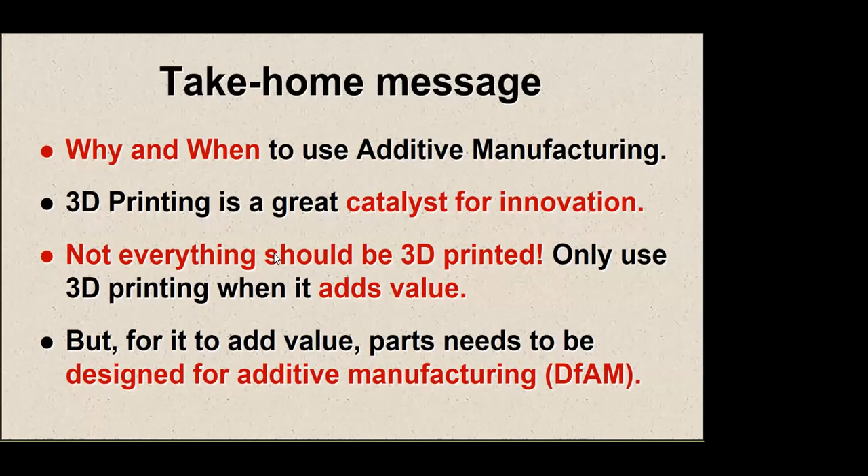additive manufacturing. Today, really, the take-home messages for you guys is why and when to use additive manufacturing. And really important takeaway is that not everything should be 3D printed. It's great for some things if it adds value. If not, it's probably the most expensive manufacturing method in the universe. So knowing when to use it for the right reasons, and for that to work, you really have to design for it. If you come with a conventionally designed part, designed for machining or injection molding and print it, yes, it can be done, but it'll give you a mild heart attack when you get the price for it.

So learning how to design for it the right way is absolutely critical. So I guess, the first question is, the reality today, additive manufacturing, how good is it? Can it be used for manufacturing? In many cases, absolutely yes. In all cases, definitely not. So again, understanding what the reality is important.

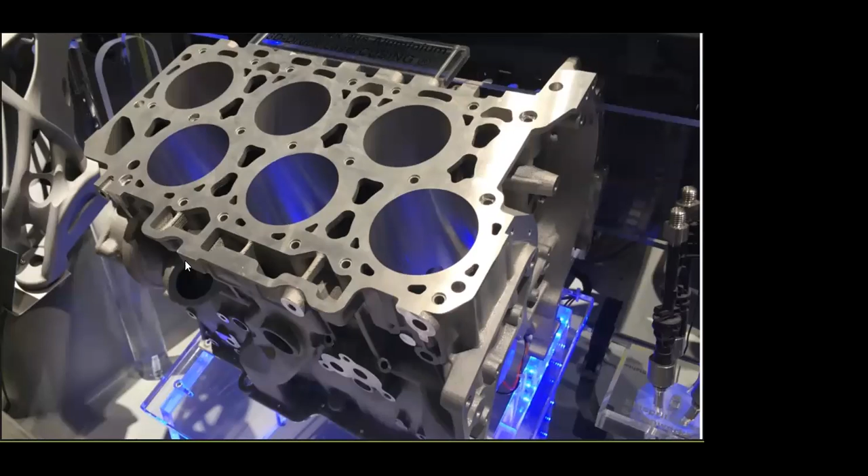Additive, exactly the same. And a really good example of that, this is from Formnext from 2 years ago, an Audi engine block printed. You can see the front row of pistons has been bored out to make it nice and smooth. The back row of pistons is as it comes off the machine. If you tried to run pistons in that, they'd grind themselves to death in a few minutes. So yeah, the reality is it's definitely usable, but you need to understand the parameters through which you can use it. So the next question becomes, why is everybody so excited about additive manufacturing? Why is it a hot topic now, anything to do with additive manufacturing?

I guess the answer is fairly simple: growth. The growth has been 20 to 30% over the last decade. Unbelievable growth, and it doesn't look like it's going to be slowing down. Even with COVID, it may not be slowing down all that much.

But by and large, in my opinion, that growth is driven by the big boys—Siemens, GE, all the big companies putting big money into it. There's still not many SMEs you can walk in today and see using additive manufacturing for real manufacturing. The simple reason is because it's slow and expensive.

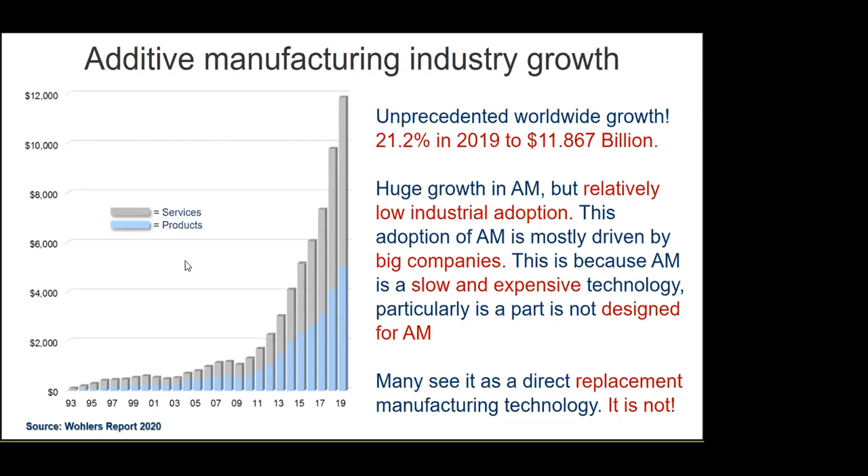So understanding, again, where, why, and when to use it is really important, and it's not a replacement technology for conventional manufacturing. That is really important. In my opinion, even looking 10 years, 20 years down the track, I don't think additive will ever replace conventional manufacturing. It's a complementary technology that, if you use it for the right reasons, gives you enormous advantages, and that's when you want to use it.

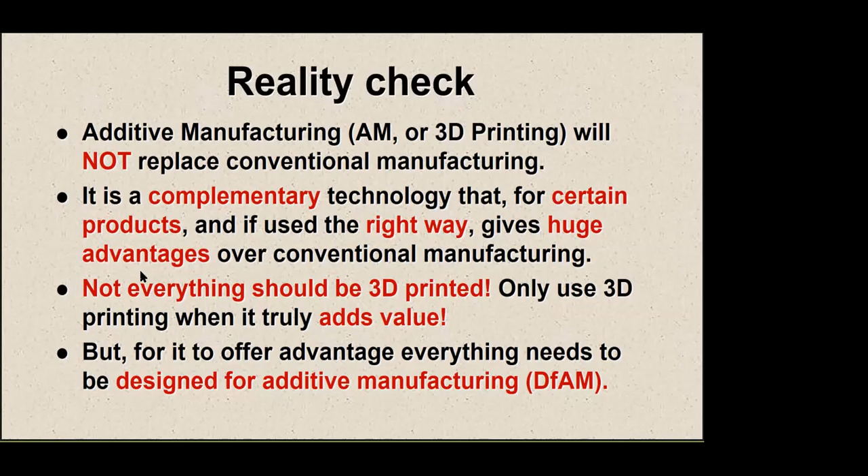Not everything should be printed. So it always becomes an equation of the value of the part versus the cost to make it. Going through some of those advantages, the best known of which, of course, is complexity.

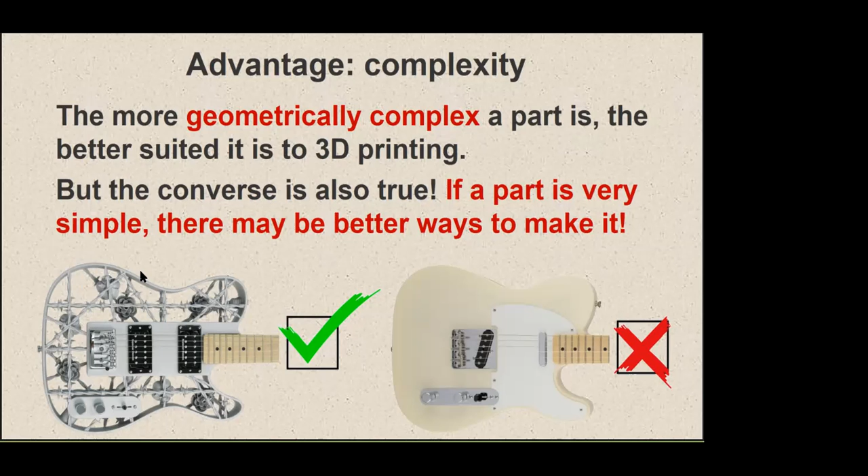So some examples of that complexity that we see a lot about: the best known one, or the very popular one, is topology optimization. Topology optimization is using mathematics to get rid of the material that's not doing anything useful. If you looked at the table or the chair you're sitting on and did an FEA analysis, you'd find 30 to 60 to 90% of the material is not doing anything useful structurally.

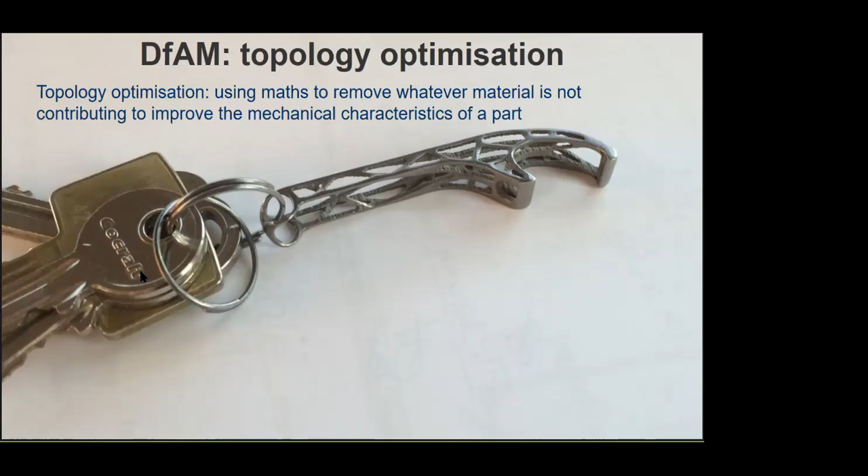So the question becomes, can you get rid of it? If you get rid of it, it makes the product lighter. So what you see on screen there is a titanium bottle opener that's on my keychain.

If you were to look at the conventional way, you'd start with a block of, in this case, aluminium—some billet aluminium weighing around 10 grams. You'd cut away around 60% of that, and your final product, the bottle opener you see in the middle, would weigh around 4 grams.

In contrast, the topology optimized one weighs one gram. Now think about that—that's a 90% weight saving over the original block of material. So the material savings can be enormous.

If weight saving is a big advantage—think about airplanes, aeronautics, race cars—then saving that weight is hugely valuable. The fuel savings in a year on an airplane, the difference between winning and losing a race, can come down to a few hundred grams.

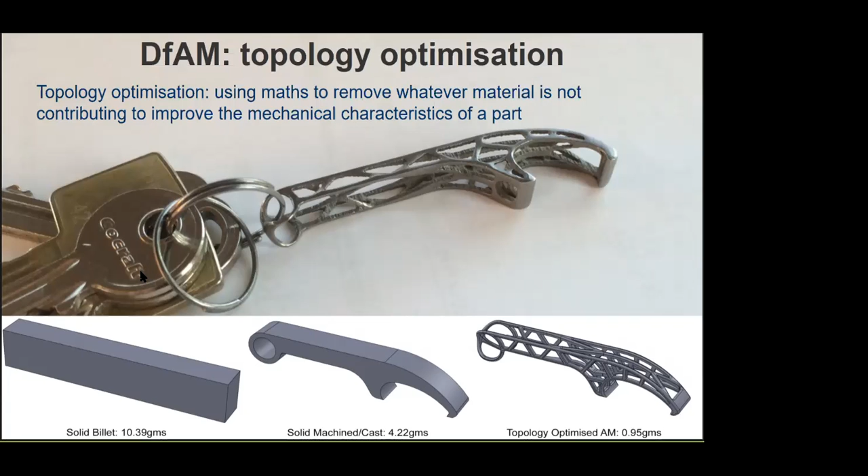Now, mountain biking people are crazy people. They spend stupid amounts of money, which I don't understand, on bikes. So that's a perfect market—it's not about how much it costs, it's about how much performance advantage it gives you. In this case, saving those grams gives you that performance advantage.

Another real world example that I was involved with a few years ago was for Atlas Copco, for a hydraulic manifold for an underground drilling rig. So what you see there is one of these giant tractors that goes into mines underground and drills holes.

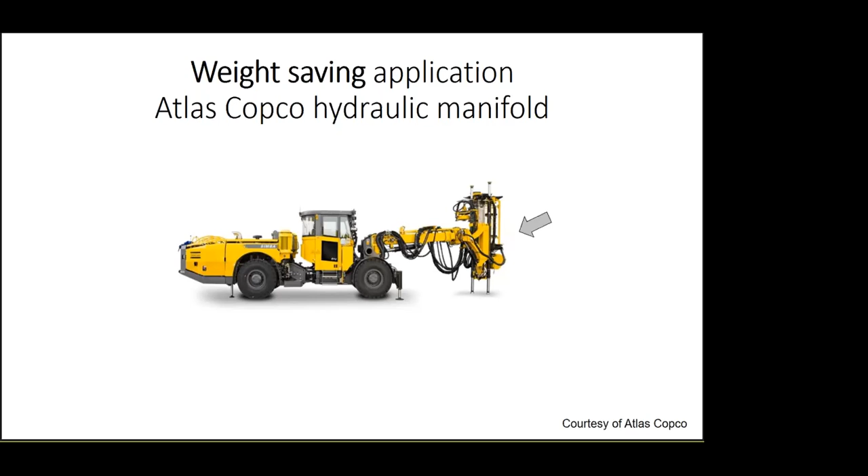I assume that's what it does. On the right side, you can see an extendable boom arm, and on the end of that, there's a hydraulic manifold, which is a block of material that takes hydraulic fluid from one place and distributes it to lots of other places. So this is what we're talking about.

At the end of that boom arm, there's that block of steel. So that's how they make manifolds today. They take a block of material, drill a whole bunch of straight holes, plug some of the holes, and that forms an interconnecting network of pipes that takes the fluid where it needs to go.

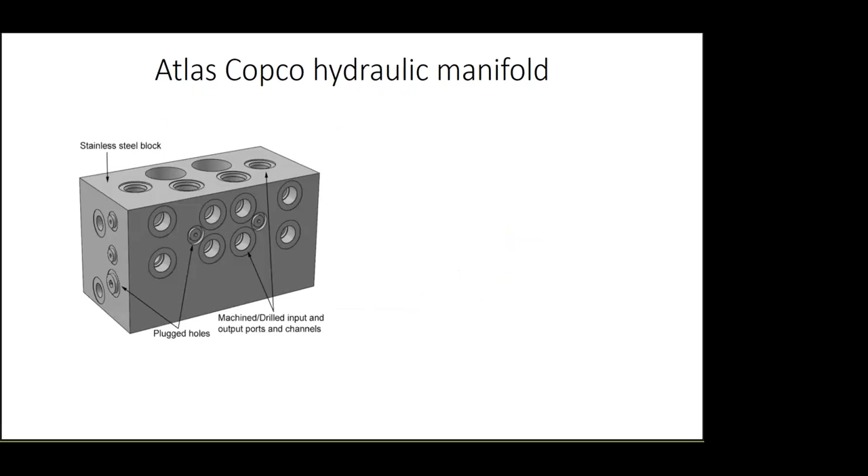They needed to lightweight that because it's a boom arm that extends, they needed concrete counterweights on the back of the underground drilling rig. We redesigned it, going from 16 kilos to 1.4 kilos. So it's a 92% weight saving. That is huge, but it's not just the weight saving, it's the material saving.

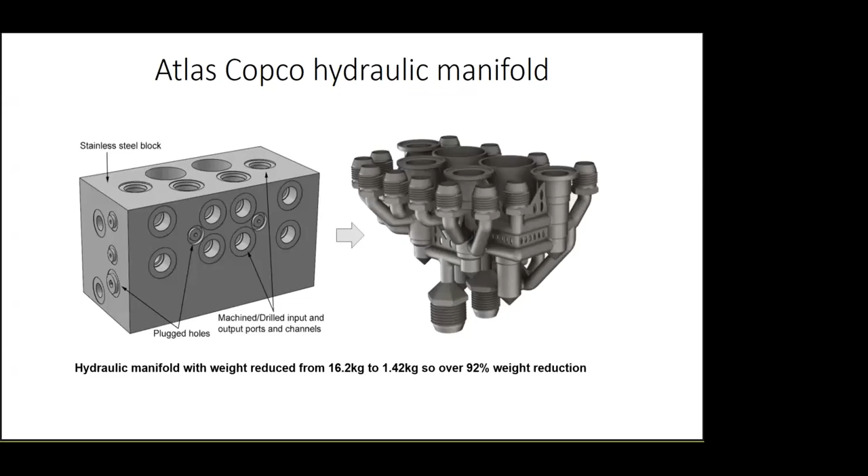This is a good example of design for additive manufacturing, because the first time we printed it, Atlas Copco said we want it printed in the orientation you see it there on screen, so vertically. The reason for that is they wanted better surface finish in the top where the valves go in, seat in to the top. So when we first printed it, we printed it that way, and you can see all that support material.

Support material in metal printing and in extrusion-based plastic printing is sacrificial material that you break away afterwards and throw away. So that was the amount of support material in it.

As it turned out, we had to machine those seats anyways to give it the RA value, the surface finish tolerances that it needed. So we now redesigned the entire manifold to be printable the other way around, and it's now printable with basically no support material.

So you cut it off the build platform when you're done, and the part is good and ready to use. In fact, even the threads are used as you see them there. They have copper bushings that provide the seal, so they don't even need to chase the threads to clean up the threads. And it provides an adequate seal. It's not the smoothest thread in the world, but it does work.

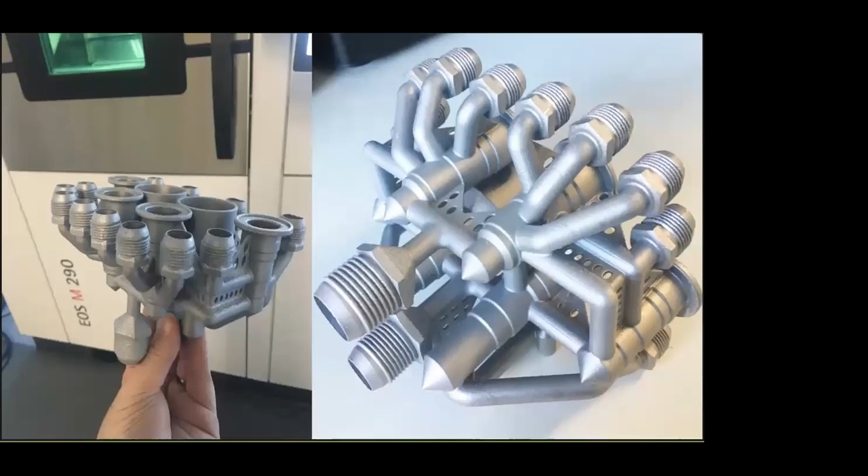So that's the finished manifold there. I'm holding it in my hand, so it gives you an idea of the size of it. The block of steel that makes it up, you cannot lift up with one hand. It's just that heavy. So as a complexity...

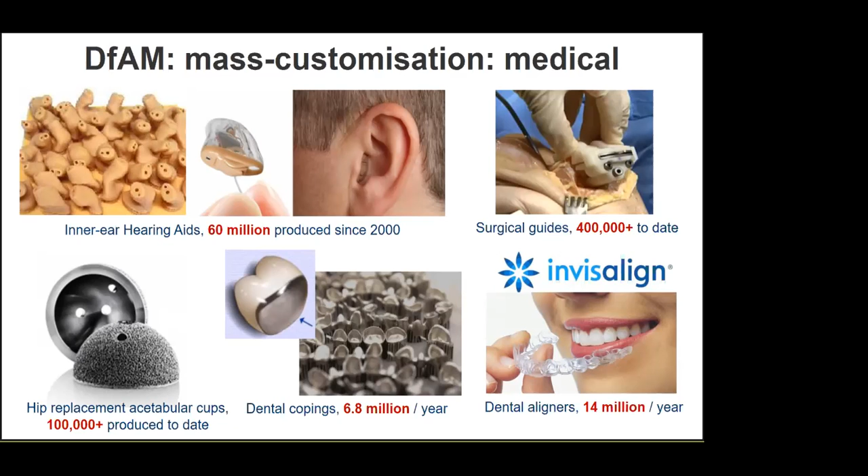But what's interesting is look at some of the numbers on screen there. We're not talking small quantities. We're talking reasonably large quantities. So mass customization in medical is huge. And one of the areas we've been doing quite a bit of work on is prosthetics.

So that whole area of mass customization is great. And one that came up coincidentally about 3 months ago when COVID started was face masks.

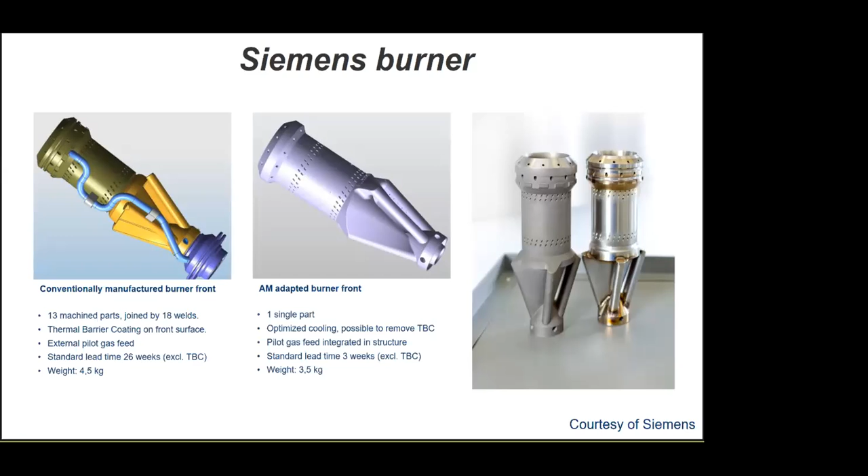And that burner, this is it in operation after it's been running on an Eon gas turbine for a year. So it shows you real world applications. Additive certainly can be used the right way.

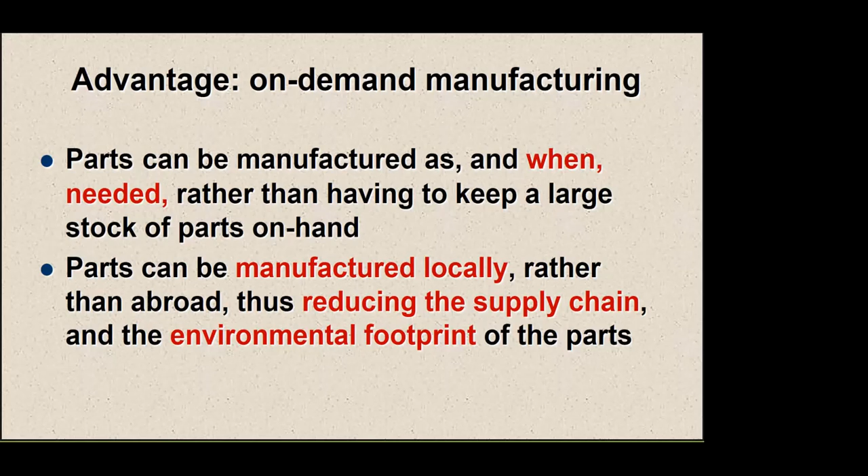Another big advantage that's had a lot of talk, particularly over the last 3 to 5 years, is the idea of on-demand manufacturing. Manufacturing things where you need them, when you need them, rather than shipping them around the world. So what we're talking about here is the supply chain.

So for typical consumer products, less than 10% of the price of the product is the product. The other 90% is that supply chain. Yes, there's all the transport, but each one of these people needs to make a profit, so it's 5%, 10%, 30% margins. That's how they make their money.

So imagine in the future potentially being able to go back to that pre-industrial revolution supply chain, where now you walk into your furniture store with a memory stick of a chair you've designed, or a digital design you've bought, and say, please print me this chair. You go have a cup of coffee, come back later, and the chair is done.

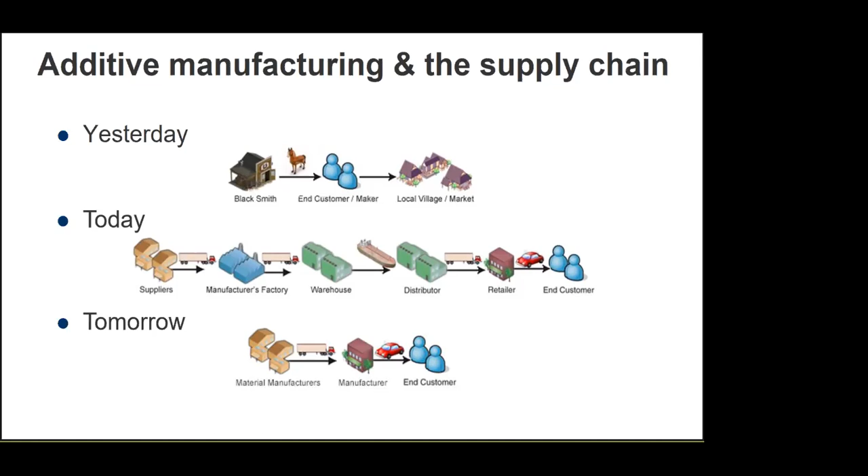Now, of course, the technology is not quite there yet to do that today, but people are working on it like crazy. It's a huge area, and the big area today is spare parts. Rather than companies keeping warehouses full of spare parts, they manufacture them as needed, when needed.

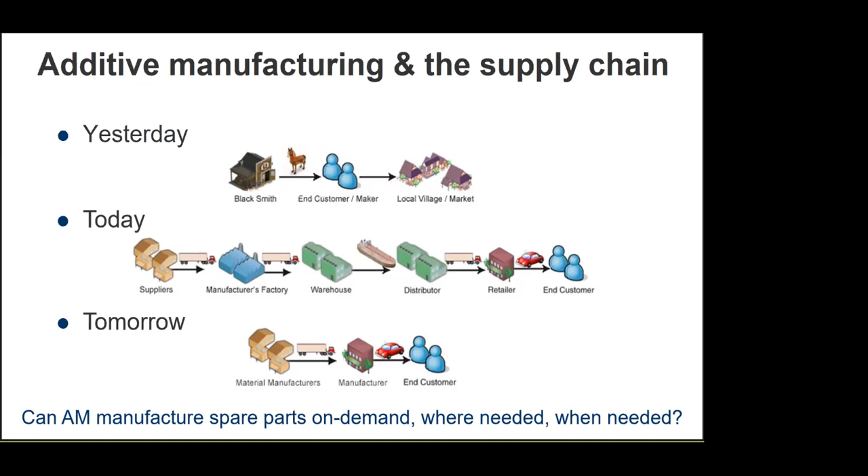Look at some of the numbers, it's actually frightening. Just the automotive industry alone, over $750 billion worth of spare parts sitting on shelves doing nothing useful at all. That's the important thing: you've got 750 billion not doing useful work that it could be doing.

Most of these companies, I mean, Tetra Pak in Sweden, for example, they've got a warehouse full of parts in Sweden. They say somewhere between 60 to 80% of those parts will get scrapped at the end of 20 years, because they legally have to keep them for 20 years. Some of those parts are consumables, say seals for machines they send out all the time. Other parts they never send out, but they have to keep them.

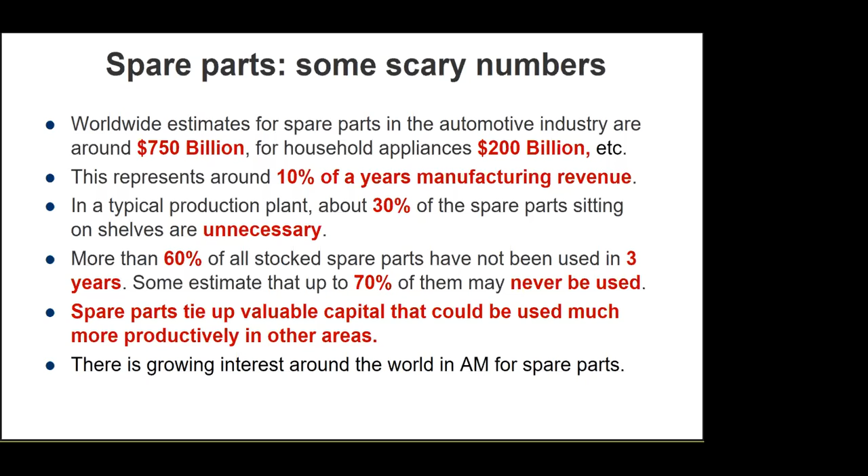So imagine being able to get rid of all that inventory, keep a digital inventory instead, and make parts not just when needed, but where needed. So instead of shipping them around the world, if you need a part in Japan, you have it manufactured in Japan. Yes, there are a lot of certification and qualification questions about that, but that is being worked on all around the world.

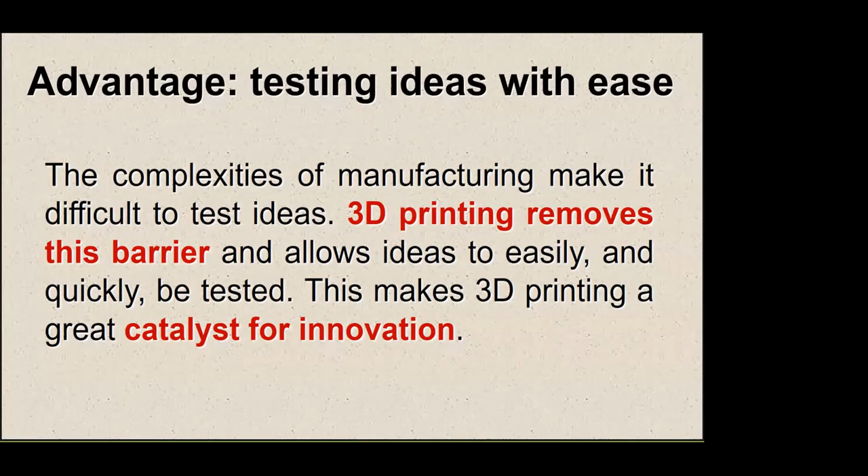This is a little emergency ventilator, so nothing special. It just replaces the hand of the doctor or the nurse that would otherwise be massaging the ambu bag. So it's not a ventilator, it's just something to help somebody get from one end of the hospital to the other, and it allows the doctor to do something more valuable than massage an ambu bag.

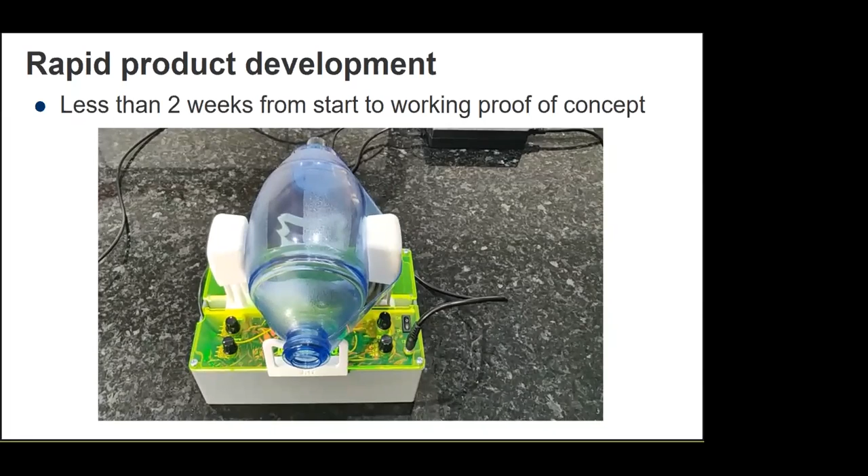The point with this is we went through three iterations in less than two weeks. From the idea, the first iteration sort of worked, not quite, then another iteration, then a third iteration, and we had it working right in two weeks. That is unbelievably valuable.

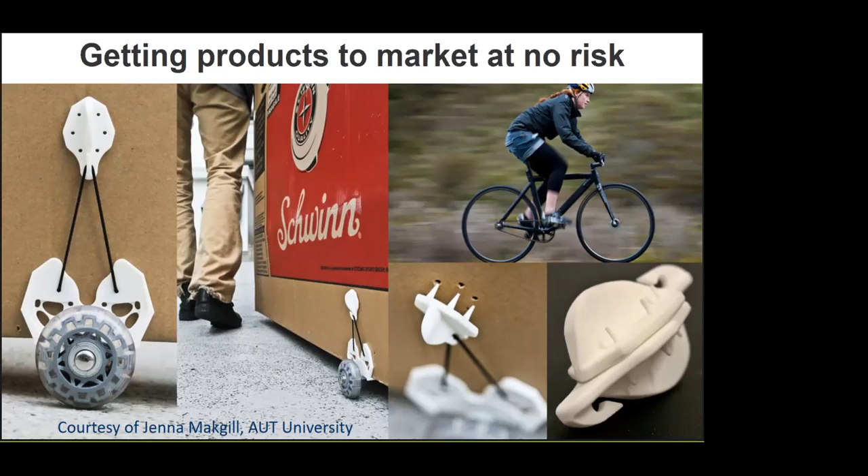Another example, this is Jenna Makgill, one of my students from probably going back almost 8 or 9 years now. She's an avid mountain biker, and when she travels around, she's got a big cardboard box with a mountain bike in it that's too hard for her to get around. So as a third-year design project, she said, I know, I'll make a little set of clip-on wheels that you can clip onto any box.

Really, really great idea. Now the wheels, you can go to your local hardware store, to Kmart, and buy skateboard wheels, so no point printing those. But she printed the clips, and she did a really good design to make interlocking clips so they could be printed in the smallest possible volume. With 3D printing, as the volume goes up, the cost goes up exponentially, so if you can keep your volume small, there are big advantages in doing that. So a really nice example of idea realization.

And I think my next example of that is to say something politically incorrect about Apple products. Design flaw on the Apple: the iPad in particular has got a design flaw where the speakers are on the back of the iPad, which means the sound is going the wrong way, away from you.

So bass doesn't really matter because it's omnidirectional, it goes in all directions. But treble, the high frequency sounds, go straight out the back. So if you listen to voice in particular, if you're watching a movie, the voice is always a little bit bassy and a bit hard to hear. A bigger problem in my case is I'm lying in bed watching a zombie movie and the sound is going straight towards my wife, so there were political reasons why I had to solve this problem.

So I spent a few weeks with a post-it note stuck to my iPad, which sort of worked, but looked a bit unprofessional. So I designed a little clip-on iPad speaker. It's just a stupid little widget that you slide onto your iPad and it redirects the sound towards the front.

That ability to have a problem, try a few crazy ideas that may or may not work - that's where 3D printing gives you an invaluable example. Now that I've got the iPad Pro, I've had to put it on steroids and go quadraphonic because it's got 4 speakers on it.

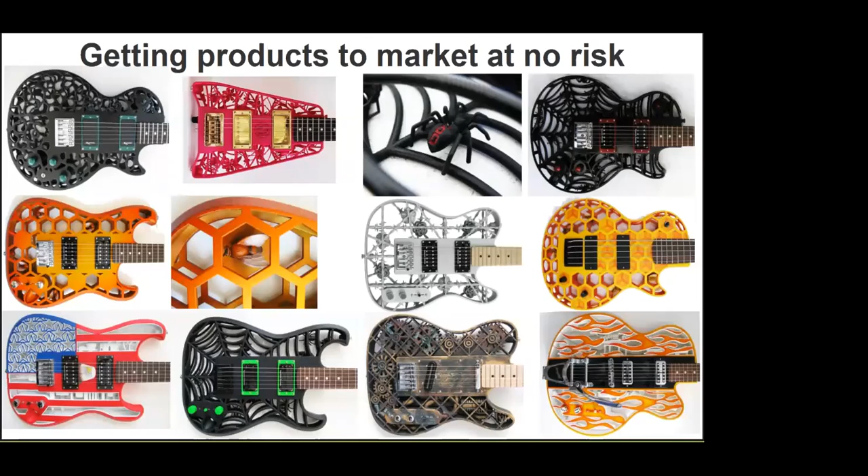Just to give you an example of some of them - all crazy shapes, internal shapes that would be impossible to make any other way. Because if I was going to make regular normal guitars, I wouldn't be 3D printing them.

It made sense because I was doing guitars and basses to print the rest of the band. I think I've done about 3 or 4 drum kits so far, 2 or 3 keyboards, and 1 saxophone, which doesn't quite work yet - I need another iteration to make that work properly.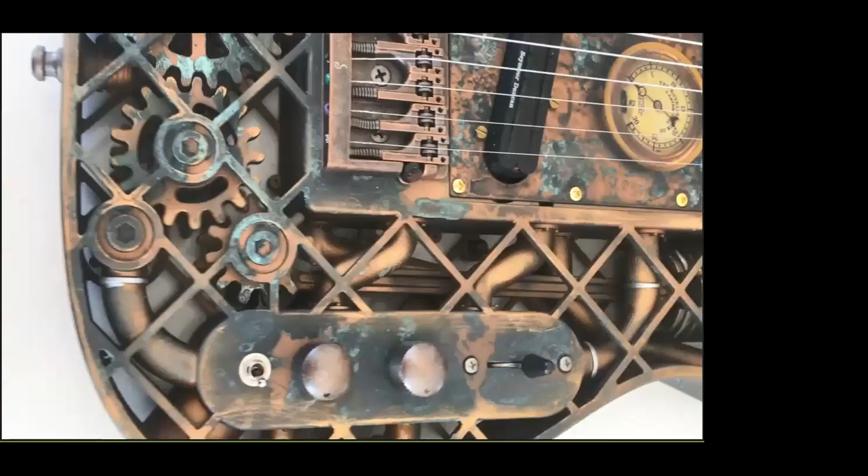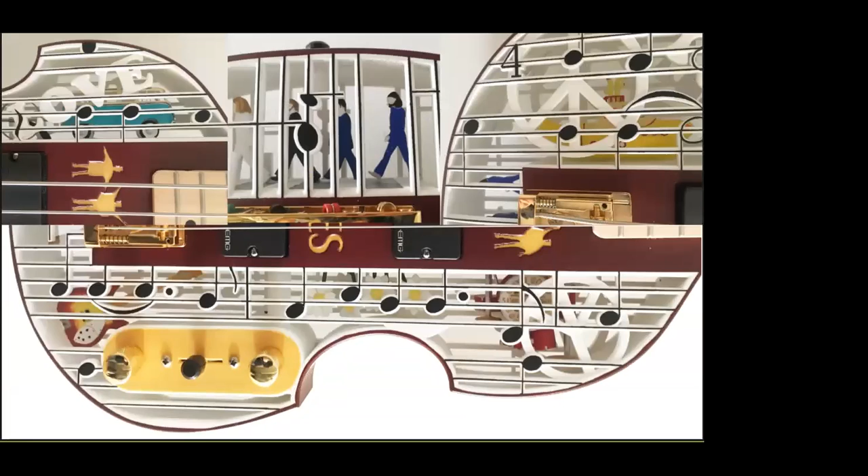One of my more recent ones is the Beatles themed bass - I'm a big fan of the Beatles. It's the Höfner bass that Paul McCartney plays, sort of a violin shaped bass. It's got the score for Yesterday on the front, and inside there are iconic scenes from Abbey Road - the famous crossing scene, the Sgt. Pepper's drum kit, and so on. It's a beautiful work, and my wife kindly painted all the inside bits by hand with a paintbrush - an unbelievable labor of love to get that level of detail in.

This is a hobby project, but one that I enjoy doing, and it keeps my creativity going, thinking about what I can do next. I've done an alien themed one too - themed guitars are always a lot of fun.

One important thing I need to point out, related to design for additive manufacturing - earlier when I talked about the manifold we printed vertically with all that support material - one of the key goals of design for additive manufacturing is to minimize the post-processing needed. This relates to one of the big myths of additive manufacturing: when people from machine manufacturing companies paint a picture like you hit print and get these magical polished parts coming off the machine.

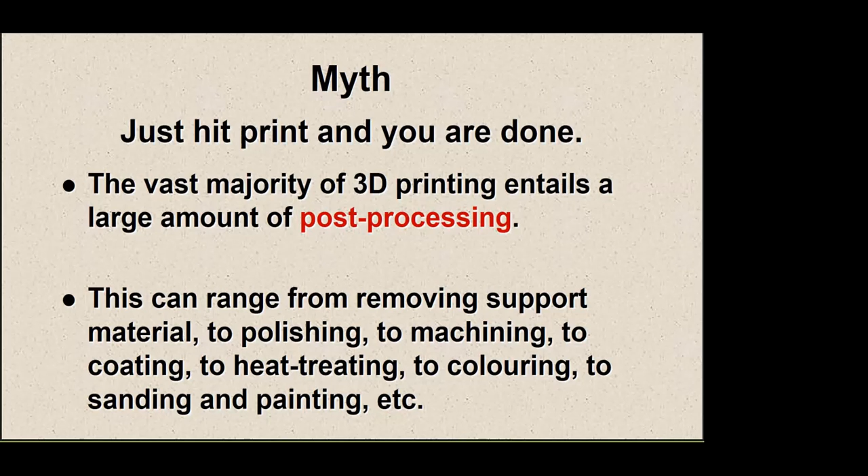Unfortunately, that is not the case today, and won't be for the foreseeable future. Now, there are many people working on automating post-processing in various ways. Post-processing is all the work you have to do after you print the parts, something as simple as removing support material. For any of you who've used extrusion-based FDM printers, MakerBot style printers, you will have learned the nightmare of removing support material, where you've got to break it off and you stab your hands while doing that. Polishing, machining, painting - all my guitars, for example, were painted. That's extra work you have to factor in before you can actually sell your parts.

To exemplify that, this is a project that TiDA, the Titanium Industry Development Association, a company in New Zealand, did a few years ago. It was for a conference in 2013, an HVAC conference, where they printed little spanners to give to people, printed in titanium. What you see highlighted in yellow is support material that you've got to remove, you've got to break it off afterwards to get rid of it all, and that is a huge amount of labor. Now imagine doing 200 or 500 or 1,000 of these spanners. We had a team of student labor, luckily, that was able to remove all the support material, but it's something really important to take into account in the overall equation of what you're doing.

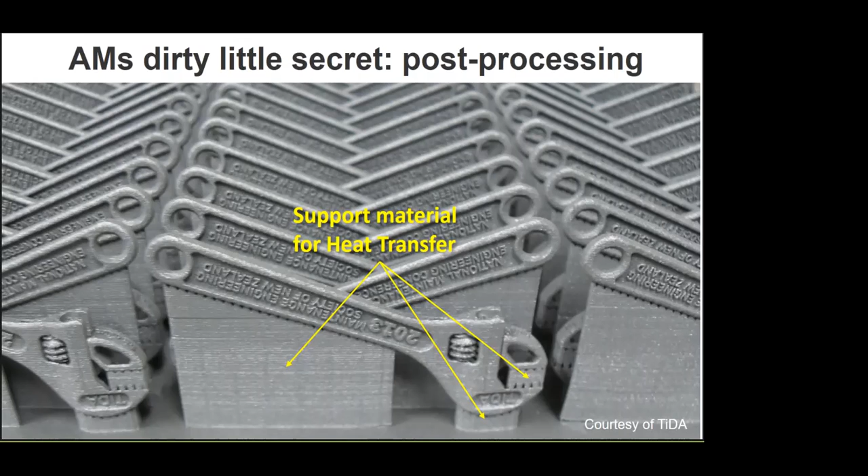I'll give you one more example of post-processing. Going back to the Wohlers Report, we do a survey every year, and pre and post-processing in metal AM is somewhere between 35 to 45% of the cost of a part. So any design work you can do to minimize that post-processing is money in your pocket. That manifold example I showed you earlier, by flipping it upside down and redesigning to have no support material, we saved a lot of money and a lot of time.

This is one of the guitars that was on the slide earlier - the first guitar printed in aluminium, I think the first 3D printed metal guitar in the world. What you see there is the guitar still welded to the build plate, the whole guitar. Printing in metal is a welding process because there's a huge amount of stress when you weld, trying to curl the part up. The support material there is to anchor it to the build plate and act as a heat sink to suck away the heat and prevent it from distorting.

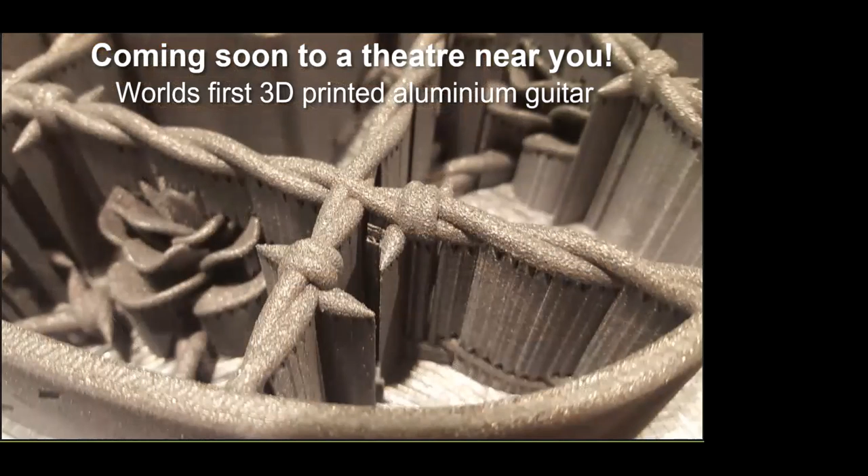Just to show you a close-up, you can see the theme of the guitar is barbed wire along the top, front and back, and there are roses inside. What you see there is all the support material separating the strands of barbed wire, and if you look closely, even in the flowers, you can see the petals with support material in them - that is a nightmare to remove. For those of you who have experienced the joy of removing plastic material from an FDM printer, put that on steroids and imagine doing that with metal.

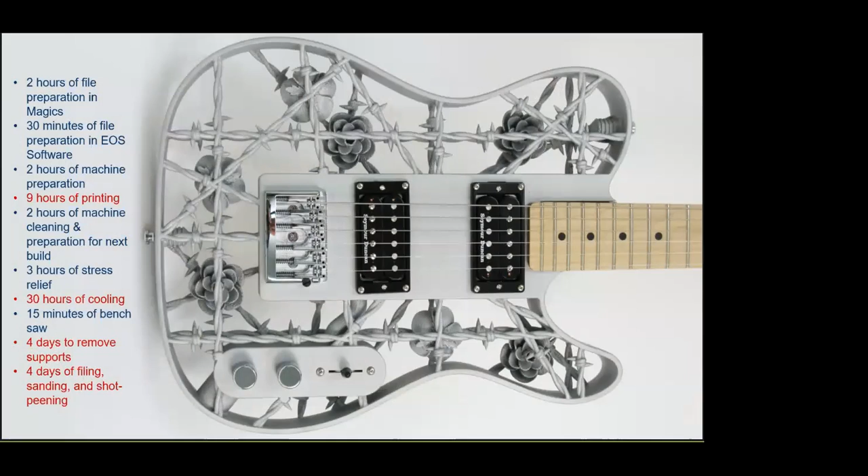Aluminium is relatively easy to remove; steel, in comparison, would be unbelievably difficult. So, the final product - a relatively stunning guitar, very nice, one of my favorite ones, plays beautifully. The print time was actually not too bad because it's only 40 mil high, and it was done on a 4 laser machine, 9 hours to print. The cooling, the heat treatment, was probably a bit over the top - this is an artistic work, so it probably didn't need the 30 hours of heat treatment afterwards - but the big point here is the post-processing.

I've printed 2 of these. The first one took me 4 days to remove the support material, and my hands were bleeding by the end of it. This is because on the first one, you don't know the best technique for removing the support material for that particular design. Remember, with additive manufacturing, chances are every design could be different, which means for every design you've got to relearn how to remove that support material.

And then another 4 days it took me of filing, sanding, shot peening to give it a beautiful, really nice professional looking surface finish. The second guitar I did took me 2 days and 2 days, but that's still 4 days of expensive labor to get the guitar to the level where it needs to be a sellable product.

So again, being able to minimize that effort is one of the big points of additive manufacturing, and it's probably one of the first rules.

So my general rules of design for additive manufacturing: the first step, get rid of all of the material you don't need. Material is the Achilles heel of additive manufacturing. The more material you have, the exponentially higher your print time goes. I heard somebody describe printing in metal or plastic on industrial systems as the equivalent of painting your house with a Sharpie marker, a little black marker. That's the time it takes. So any material you can remove saves you time, saves you money.

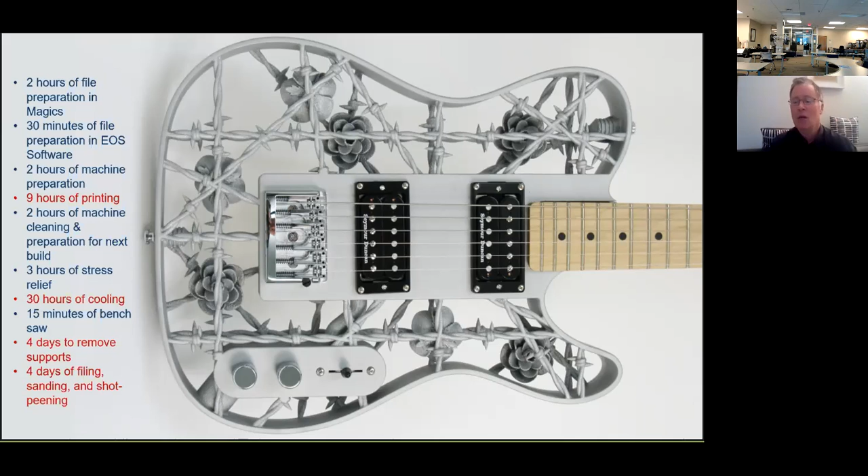So design for additive manufacturing is absolutely critical if you want to use it for beyond prototyping, to make parts to sell to customers.

So with all that marvelous world of 3D printing, and it is a wonderful technology, what's missing? Unquestionably, we need more materials. We have a dozen or so metals to choose from, a dozen or so polymers to choose from. We need more of them, unquestionably.

We need products that, we talked earlier about on-demand manufacturing, manufacturing parts around the world where they're needed. Well, to do that, you've got to be able to guarantee the part you get is of the right quality. So a lot of work is going on around the world for that, but still a lot required before people trust the technology. Engineers in general are very conservative, so the more we can do that, the more it'll be adopted.

Better design tools, absolutely. We talked about topology optimization. There's some amazing tools coming out for lattice structures and gyroid structures. nTopology is a fantastic tool. We need more of those tools to make it easier for us as engineers and designers to get those products right. And really important to my mind is we need to update our engineering curricula.

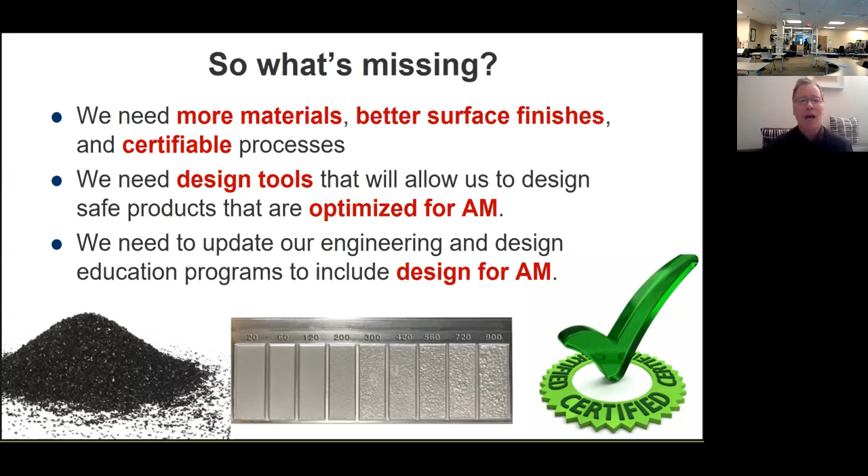So really, that was 30 minutes of my general thoughts on the importance of designing the right way for additive manufacturing. So I think I'll leave it at that, other than to give you my email address.